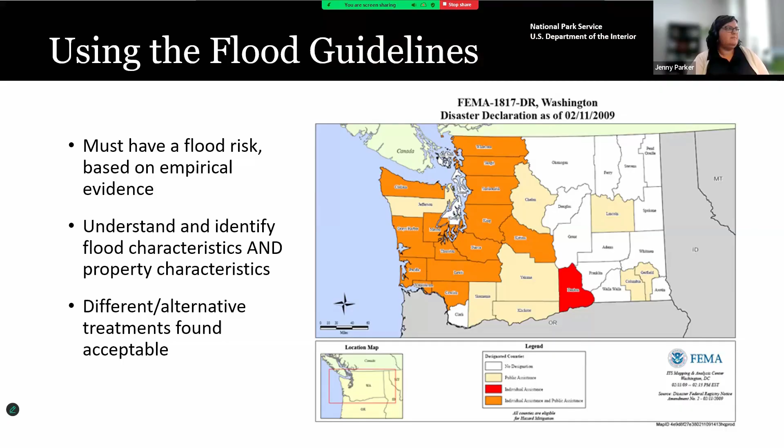So let's talk about assessing your risk and selecting treatment. One thing to be aware of is that you need to do the best you can to understand what the future conditions at your site are going to be. And we understand that this is always going to have some element of guesswork to it. In many cases, we're talking about very highly educated guesswork, but there's still some level of uncertainty.

Future conditions might have a broad range depending on our current use of certain materials or the way that our community is choosing to adapt on a larger scale, which can have an implication for specific sites. So for those kinds of reasons, your predictions or your guesswork for the next 5 to 10 years are going to be more reliable than your future condition expectations when you start looking out 50 years into the future or 100 years into the future. So keeping that in mind with any project as you're starting to plan, it's important to identify a time horizon for the adaptation project that you're planning, and that should be a conscious and logical choice.

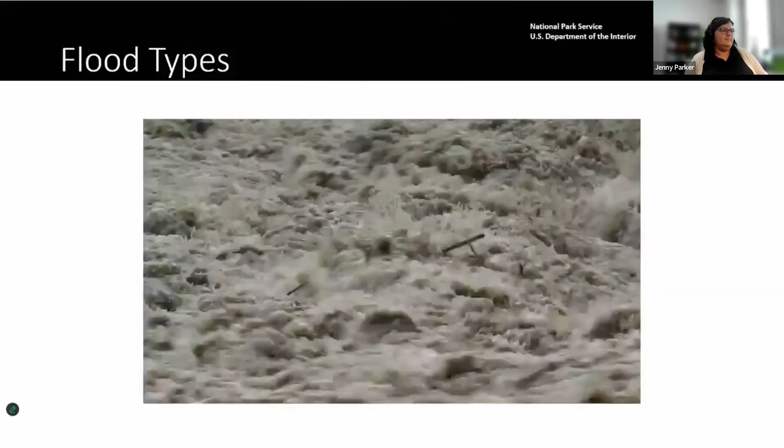Flash floods occur with little warning time, developing over minutes or hours, often due to heavy precipitation or the failure of a dam or levee. Floodwaters in these situations generally are fast-moving and often carry debris such as logs, boulders, fuel tanks, or even cars in extreme cases. Flash floods are generally associated with a waterway, but it could be a minor stream or creek that is barely noted or completely dry at other times.

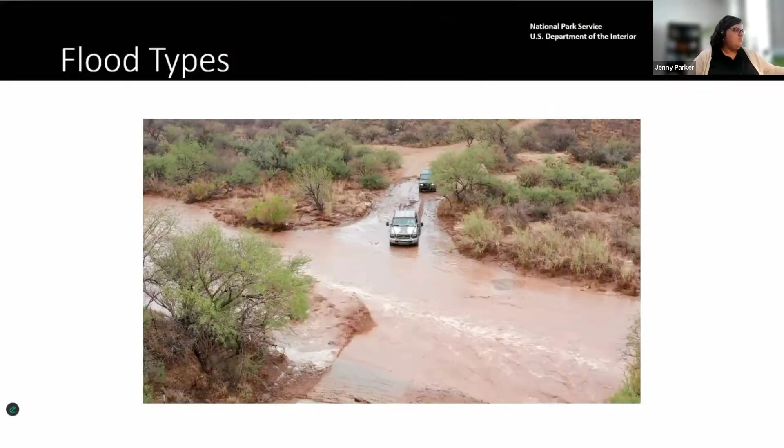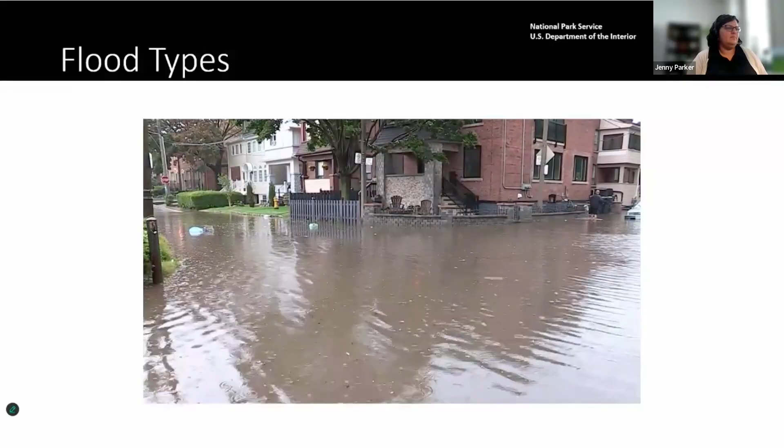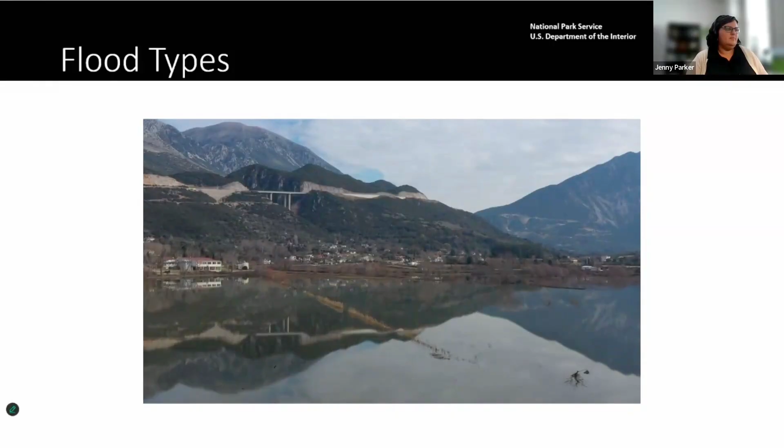Surface floods, also called urban floods, can occur in any developed area. This type of flooding is most often caused by intense rainfall that overwhelms a storm sewer system, causing water to overflow into roads and buildings. Areas damaged by wildfires are especially susceptible to surface flooding because of the changes to the soil caused by fire and the loss of vegetation that would ordinarily help absorb the rainfall. There's generally little warning time associated with surface floods.

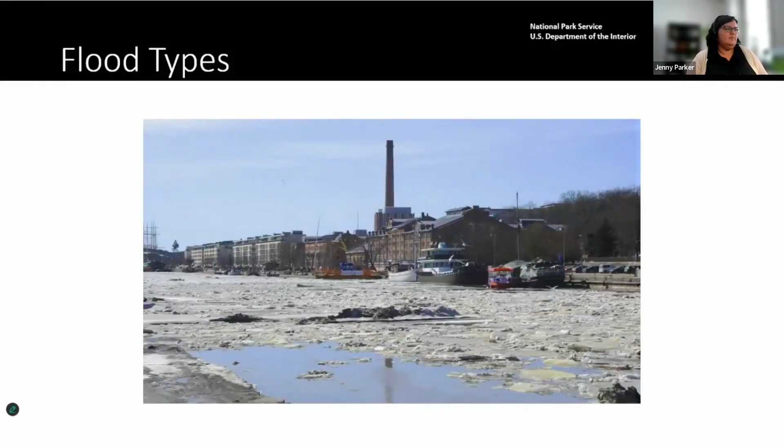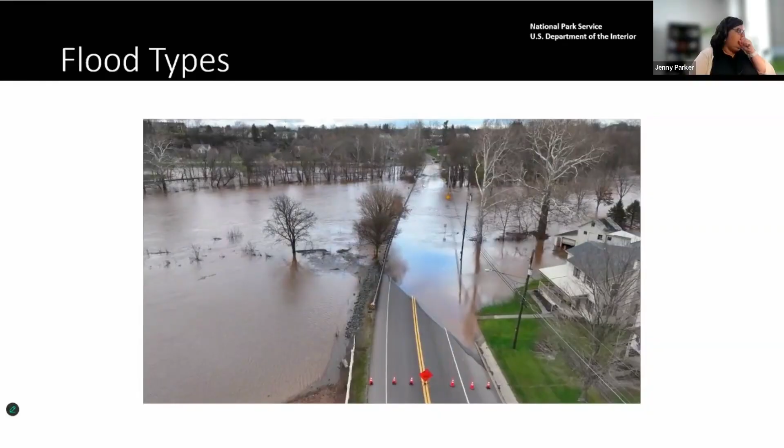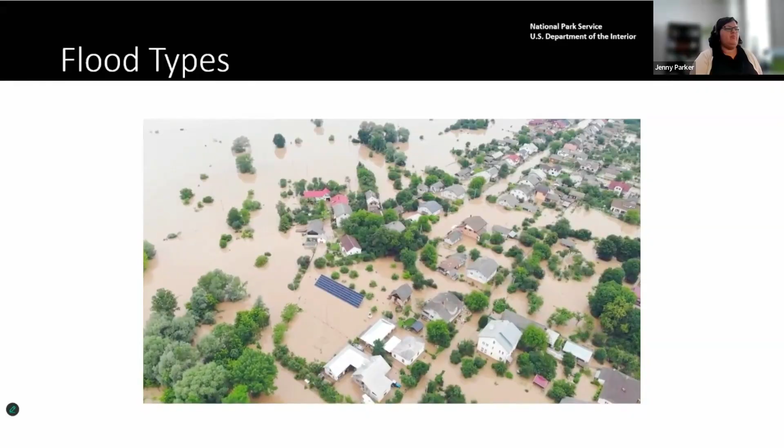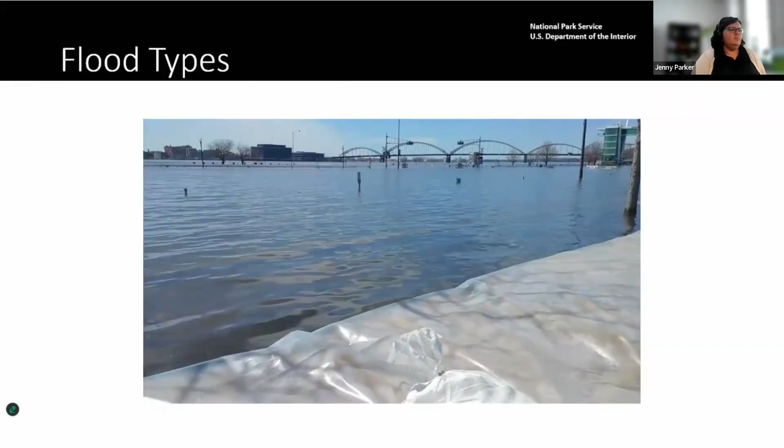Riverine floods, also called overbank floods, happen because of snowmelt, ice jams, or heavy and/or prolonged periods of rain feeding a river or stream. The waterway reaches capacity and the excess water spills into the surrounding areas. In areas with wide, flat terrain along a riverbank, floodwater may rise gradually with little velocity, but in steeper areas, floodwater can rise quickly, moving with speed and carrying debris. Some riverine floods are predicted several days in advance, with meteorologists referring to a river reaching a flood stage, often along with a prediction for when the flood will crest. Riverine flooding may also cause channel migration or bank erosion, which can contribute to or exacerbate flood impacts.

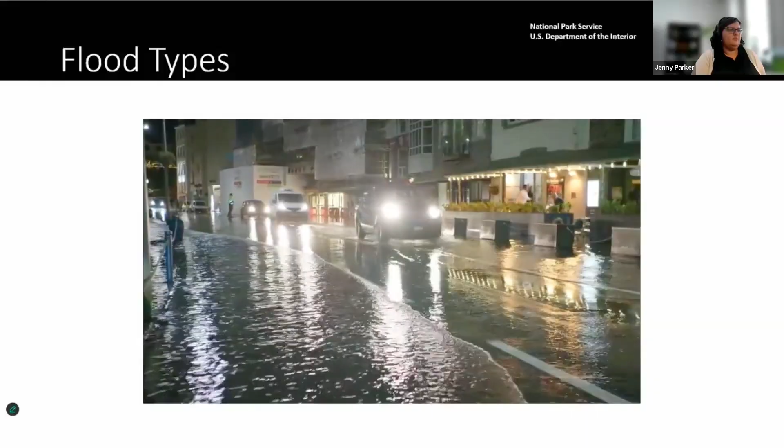Coastal flooding occurs along the coastlines of large bodies of water, including the Great Lakes and tidal bays and rivers. Extreme high tides, sometimes called king tides, can send water farther inland occasionally, sometimes coming up through storm water sewers. This type of flooding usually results in a few inches of water in the lowest lying land areas. Where sea levels are rising, occasional extreme high tides transition into flooding from more regular high tides. These events are often referred to as sunny day or nuisance flooding, which will become increasingly frequent in many coastal locations.

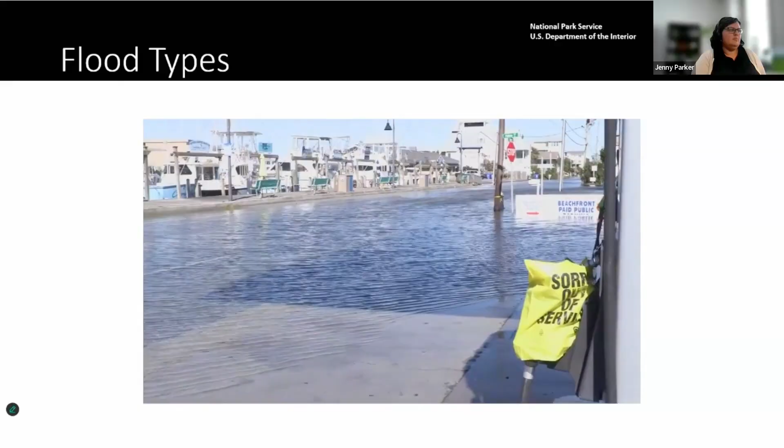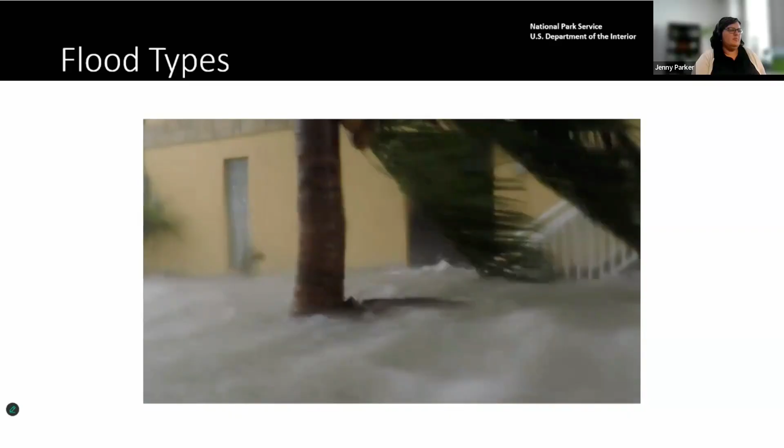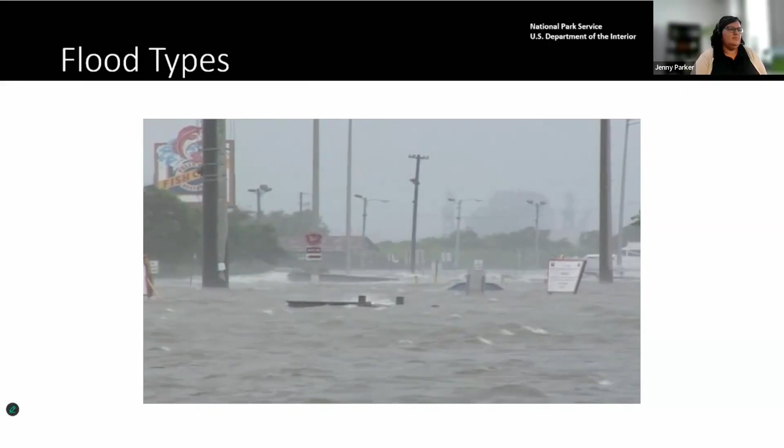Storm surge results from the winds of a storm, like a hurricane or typhoon, pushing water on shore. Depending on the magnitude and characteristics of the storm, this can result in fast-moving floodwaters with the added force of waves acting on any structure in the path of the flood. Flooding associated with both high tides and with storm surges are predicted several hours, if not days, in advance of inundation.

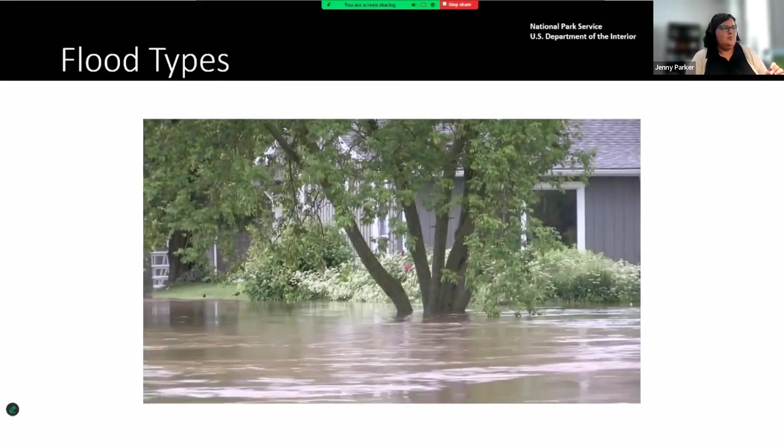Okay, so hopefully you recognize the type of flooding that is typical at your site. So if you have one in mind, hopefully one of those descriptions resonated with you and you can keep that in mind.

There will be a judgment call at a certain point. But the piece that I think is really important for us to dig into today is understanding the depth of your floodwater. This slide has a lot of information, and we're going to spend a little time here to make sure folks understand this concept before we move on.

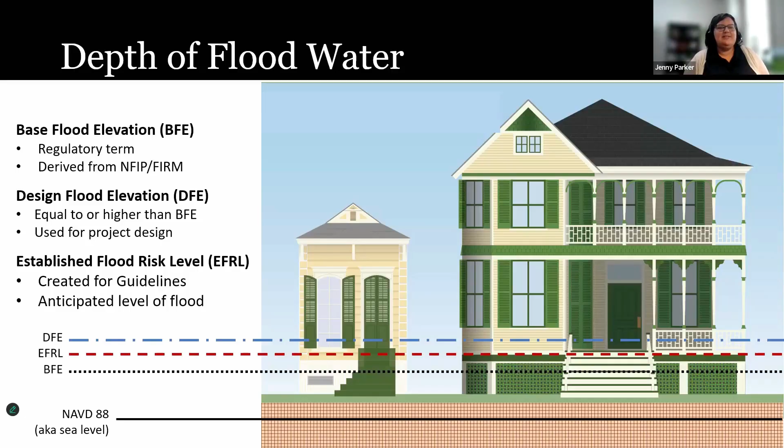Hopefully I've hit that hard enough and everyone's on the same page. If not, feel free to throw some questions at me when we get to the break here in just a couple of minutes. Let's walk through an example real quickly to illustrate this point.

This is a historic house in Rhode Island, first developed around 1728. You can see on the map it's located pretty close to the harbor, but not immediately on the water. It's a little misleading because this is an area that was infilled and developed over time. The house was actually very close to the water, much closer than it is now, but that land was filled in over time to create more area for development.

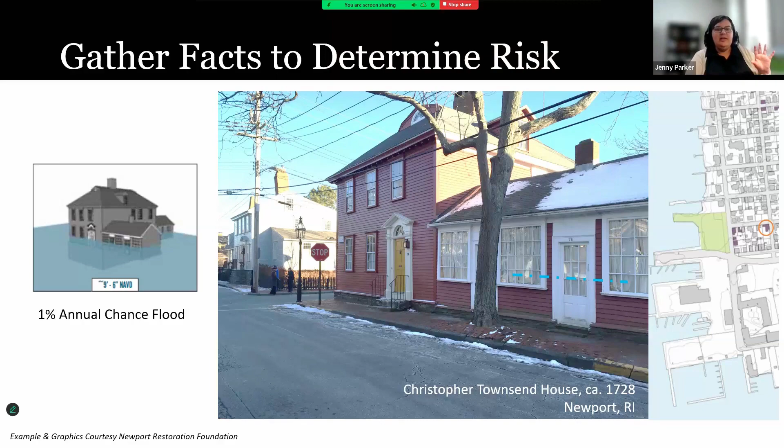In the graphic on the left, you're looking at a representation of the base flood elevation, which is the level representing a 1% annual chance flood—at this site equal to 9 feet 6 inches. Again, that's not 9 feet 6 inches above ground level; it's referring to that vertical datum line. When you measure that out, it comes to a spot I've marked on the photo with a blue dashed line. In the door on the right side of the photo, it's about a third up in the glazed portion of that door. That's your typical risk based on the base flood elevation information for this site.

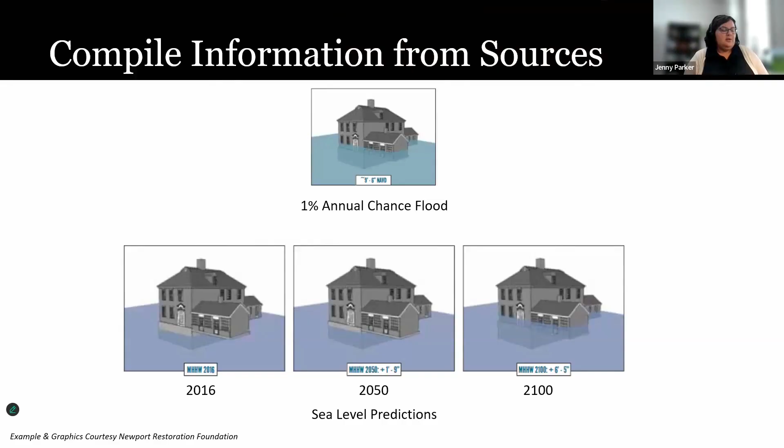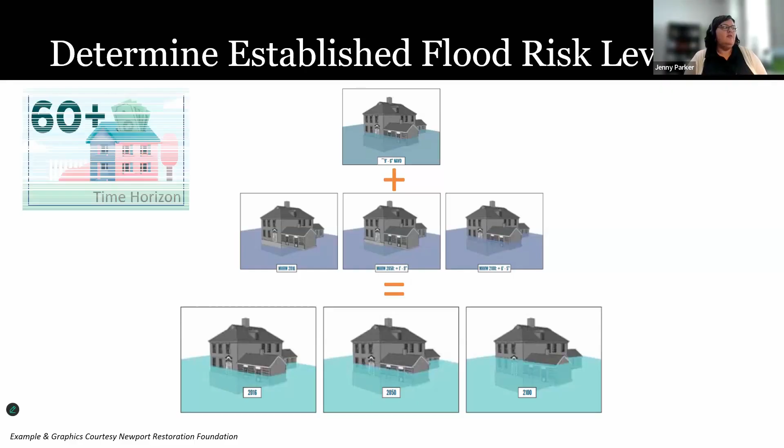So when we put all this together, we end up basically adding our 1% annual chance flood level onto those increases in sea level rise, giving us three different time horizons for our potential risk. If you're planning a project where the pieces and parts have a relatively short service life, you can probably get away with planning to current conditions or maybe to 2050 conditions. But if you're dealing with structural changes meant to last however long we can manage to preserve the site, you might really want to look at what the risks look like in 2100.

This is how you can add up your different risks in one simple example and arrive at an established flood risk level. So again, if I gave you this site—a downtown building, a fairly typical wood frame house, row house—and told you that the established flood risk level was 6 feet...

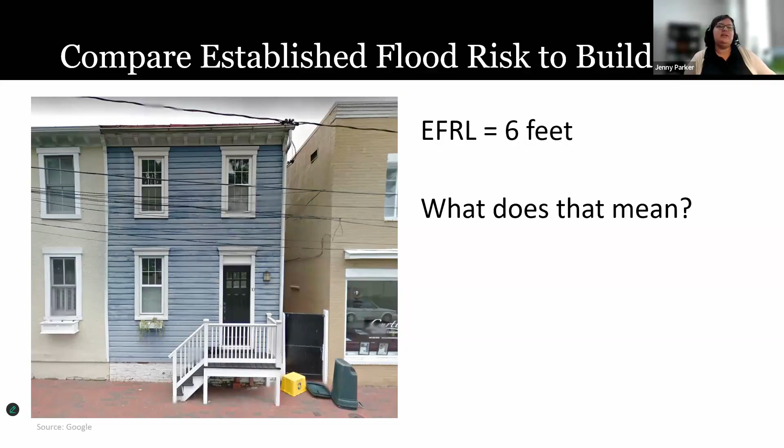I'm guessing you're all scratching your heads thinking, well, Jenny, that's not enough information. You already explained that 6 feet does not mean 6 feet above grade. If that was your thought, you're right with me. If you just know the raw number, it doesn't help you plan against the adaptation you need to do. It's a first step, but you need another step to place those numbers in the real world and compare what the risk is to your building.

The way we do that, a common way, is by hiring a surveyor to come out and complete an elevation certificate for the building. Elevation certificates are part of the flood insurance process and do have some regulatory implications. You don't always have to go for one just to get the information you're looking for, but a survey team is a great route to go that's generally pretty affordable.

What they can provide with the elevation certificate is a form that's all laid out, so the surveyor will come back to you with what your base flood elevation is at that site. It will reference the existing flood insurance rate map with the effective date and what flood zone you're in. It will also identify if your site is in a protected area—for instance, if there's a levee between you and the flood source, this certificate will identify that. It also provides basic information about the building and property that helps identify what part of the property is most at risk.

What kind of impacts can you expect based on the flood insurance rate map? Some of the information the elevation certificate gives you is the first floor elevation, which is really critical—you want to know what height your first floor is compared to the established flood risk level. Another critical piece is the lowest opening, like a basement window or a vent, anything that could let water start getting inside the building. It'll also look at your equipment on site, like an air conditioning unit or furnace in the basement or on the ground outside your building. The elevation certificate will give you all of that information.

According to some quick web research I did, at least on a national scale, the cost of these certificates can range from like $600-$700 up to $2,000-$2,500. So yes, it's an expense. If you're a private property, single family home, it can be a hit on the pocketbook, but it's not out of the realm of what's reasonable for a typical property owner, especially when it gives you such valuable information.

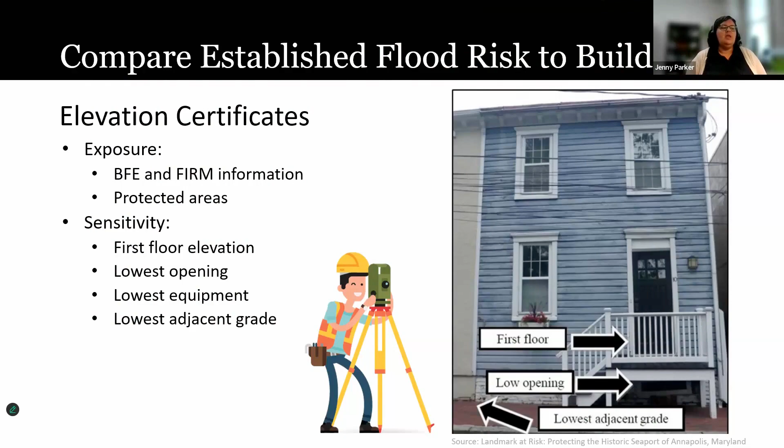I will say it's not the only way to get this information. There are some low-tech ways, like if you have a good topographical map that gives you geographic elevations you could compare. The problem is you have to make sure the topo map uses the same vertical datum as the flood information is given in—just a caveat there.

Once you have all that information, you can identify and draw the line—a term we've started using as shorthand within our building to refer to that line, that height of floodwater, that level of risk. You can draw it on a photograph or across the building to understand how high you expect those floodwaters to go, and that tells you which parts of the building and site are most at risk to damage.

Once you understand how high the flood is expected to be, you can start analyzing the existing property to see if you have any existing capacity to sustain and recover from the predicted flood event. Whether the property is in good or poor condition will matter greatly—just good maintenance can go a long way.

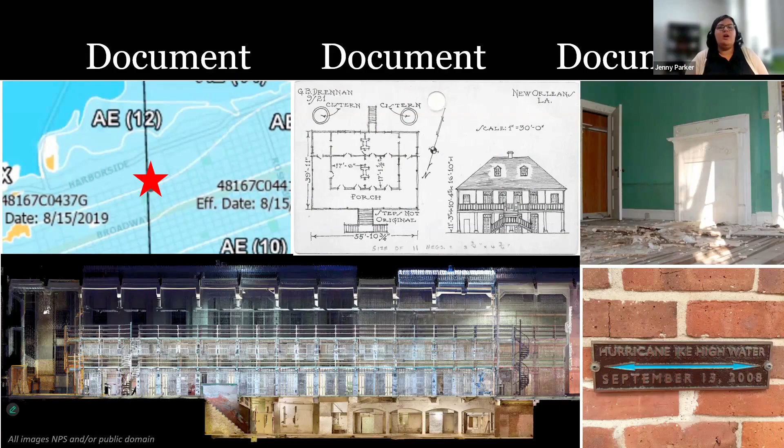Once you've figured that part out, it's really important that you document your conclusions. I like to refer to this as very similar to learning long division in school, so the final answer doesn't count unless you show your work. You really need to write it down because at some point you're going to need to talk to other people about it and share how you came to your conclusions, whether you're getting into a permitting process or just talking to your neighbors to explain what you're about to do. You're going to want to have it written down and documented so that when you move forward, everybody is on the same page.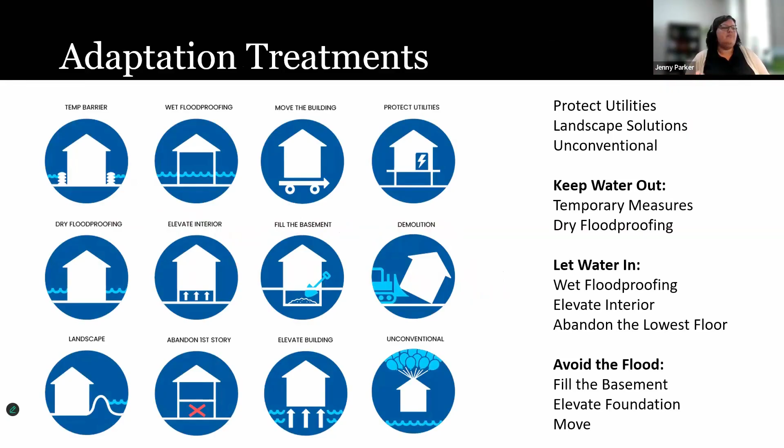Within the guidelines, we have a lot of different adaptation treatments that we describe. They're all listed here. I'm not going to go through each one individually, because that would be its own 90-minute webinar if we got into the details of each one. But we've grouped them into categories that I'll go through in a bit more detail.

The first category, as the name on the slide suggests, has the goal of keeping water out of the structure, or holding it off the envelope of the building. These treatments can include temporary measures like sandbags or inflatable bladders, temporary fencing or walls, or long-term permanent infrastructure like a flood wall, a levee, or a dike.

At the building level, the goal in this category is to keep the interior dry. So we can see something like dry flood proofing, where we're waterproofing the building envelope and closing off, either permanently or temporarily, building openings. If we decide to go with this kind of building envelope fortification, it can require structural improvements in order to withstand the flood dynamics.

The preservation concerns vary greatly. There's a lot of variety in this category, with much less concern for temporary treatments, up to some very challenging preservation issues around properties that require significant alteration to dry flood proof. And of course we have landscape and setting concerns with some of the landscape elements. So that's the overview of that category.

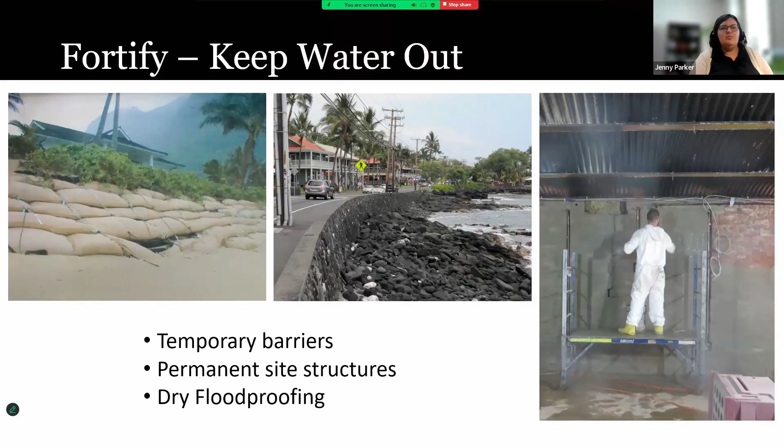Moving on to the next category, instead of holding water off a site or structure, the design of these treatments is intended to allow water to move through the site, or anticipate that water is going to enter the property. So what we're talking about here is wet flood proofing, which addresses water moving in and out of the property, designing the building to minimize damage.

In concert with more resilient finishes within the building, you may also pair that with elevating the interior floors, or you might decide to abandon the first floor of a building altogether. Either of those options would require considered study and design, but they can allow water to enter and exit a structure in a controlled and much less destructive manner.

So these spaces designed to be wet can be created with sacrificial finishes. You might need to think about using these spaces with limited use in mind, and again, the use of interior platforms to keep some parts of the interior dry.

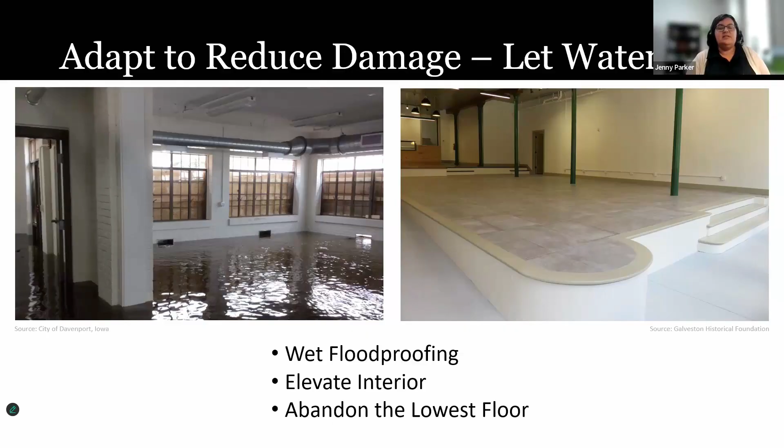One thing to keep in mind with any of these options is that the treatment will always require some level of cleanup and drying out after a flood. So they're generally not optimal for spaces with historic features and finishes that can be damaged by floodwaters. But if you have an already damaged building, and you're coming back post-disaster, this is a choice that a lot of commercial buildings particularly decide to take.

Another category, and these are actually the most common treatments used for residential structures, given various incentives that exist out there from the world of flood insurance and flood ordinance compliance. They largely stem from FEMA preference, because the goal of this category is to avoid the impacts from floods altogether by removing either the entire structure or part of it from the floodplain.

This can be done by increasing a building's finished floor height or elevation. If you're only getting flooding in a basement, filling the basement eliminates that issue, if planned correctly. You can elevate a building on a higher foundation, or simply move the building out of the flood risk area.

Each of these comes with fairly significant preservation concerns, particularly elevating and relocation. If you go really high, especially with elevating a building, you may create a very noticeable visible alteration, which can significantly impact historic character and appearance on the site.

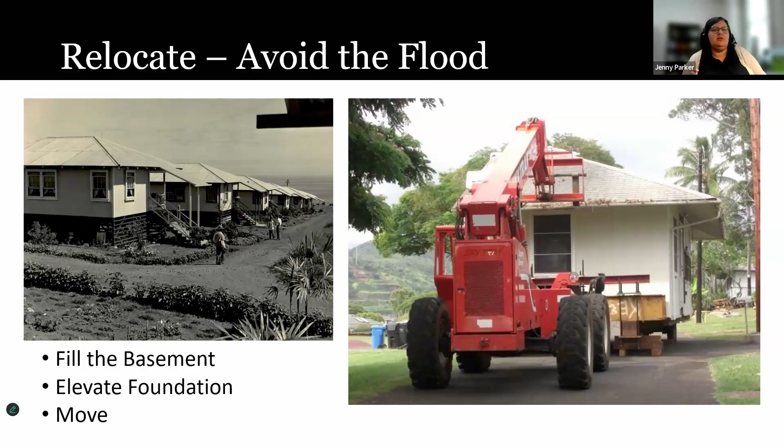I do want to mention, for those interested in the grant program that the Washington Trust will be operating in the fall, relocation is not an option, I believe, for that grant program, but you should double check to make sure I've got that right.

The final category in the types of adaptations is the unconventional adaptations, and we called them that ourselves, not anybody else, because they're not currently recognized by FEMA and the flood insurance program in the same way as the other treatments. Many of these are in the prototype testing phase or need additional application to fully understand their potential and potential consequences.

So this can include amphibious design, which is applying a buoyant foundation to a building so that it floats on top of the floodwaters. There are also hydraulic lift systems designed to use the pressure of the floodwater itself to lift the building out of harm's way.

And there are any number of innovative large-scale landscape flood protection projects that have kicked off over the last 15 to 20 years. These can be very complex engineered systems and networks that reestablish natural systems in conjunction with some engineered systems. At landscape scale, things can get very creative and interesting, but that's not usually happening at an individual historic property.

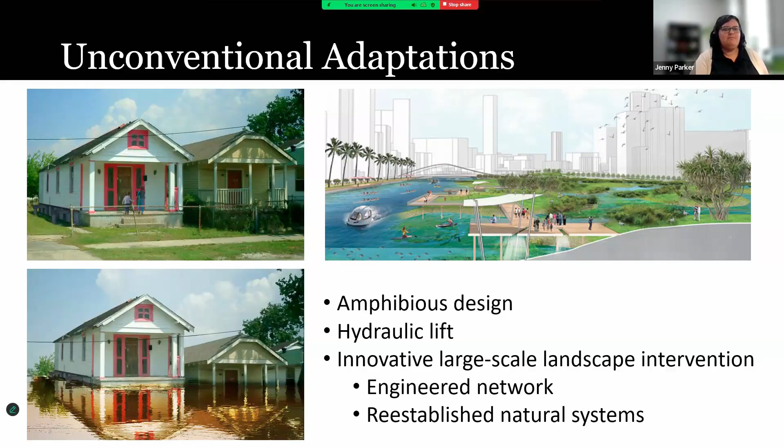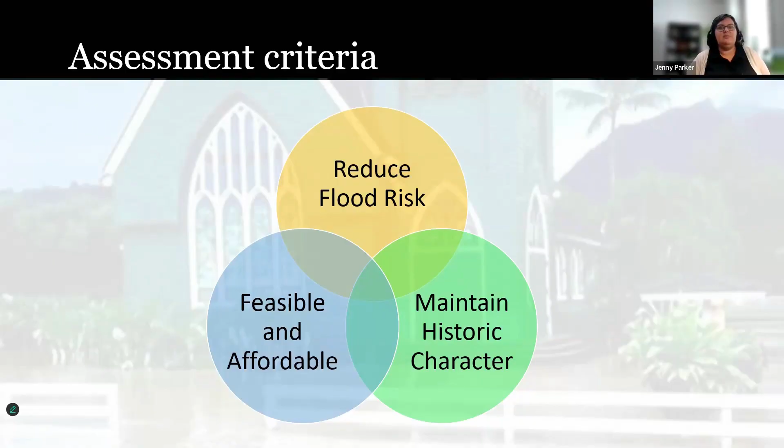That feasible and affordable option - sometimes we don't do a great job in preservation of keeping that in mind, but particularly with flood risk, you can have the best adaptation plan in the world, but if you're not able to actually implement it, the building is not safer. We have not done our job to preserve that building. So it's really key to keep that in mind.

Going through each of these criteria, I want to talk about some questions you can ask yourself as you're evaluating the different adaptation options. When talking about reducing flood risk, you want to know if the treatment will sufficiently reduce the risk of damage caused by the flood that you expect.

Again, you've got to decide on that time horizon - how far into the future are you gaining protection? Selecting the time frame can be informed by all manner of factors. We've talked about using your project itself to help decide, and you can also use the length of time you plan to manage or own that site.

There are also other factors that you can include in trying to select that time frame, but do have one in mind as you're making your plans.

For maintaining the historic character, what we're really talking about here is applying the Secretary of the Interior standards and analyzing what impact the treatments will have on the historic character of the property. So we go through this series of questions.

Can the treatment be implemented without visible changes? If that's not possible, then would it be possible to match the appearance? If the appearance can't be matched, is there a compatible solution? It's also helpful to consider viable treatments in the context of the overall neighborhood or community.

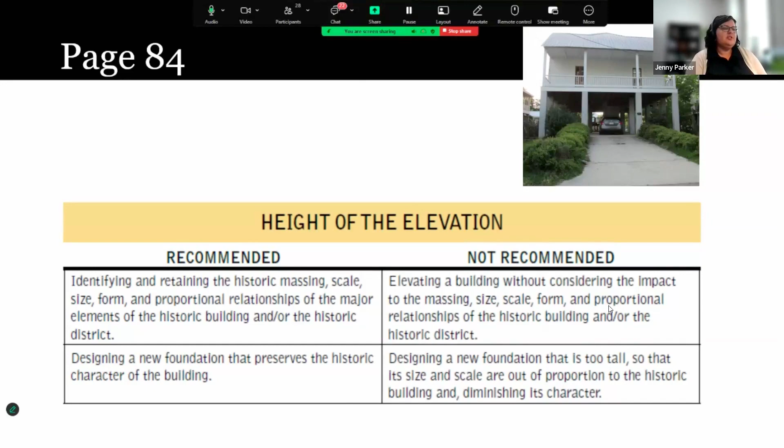Looking at the second box under the not recommended column, we have designing a new foundation that is too tall, so that its size and scale are out of proportion to the historic building and diminish its character. That starts to get at some of the gut instincts a lot of people have about this particular adaptation.

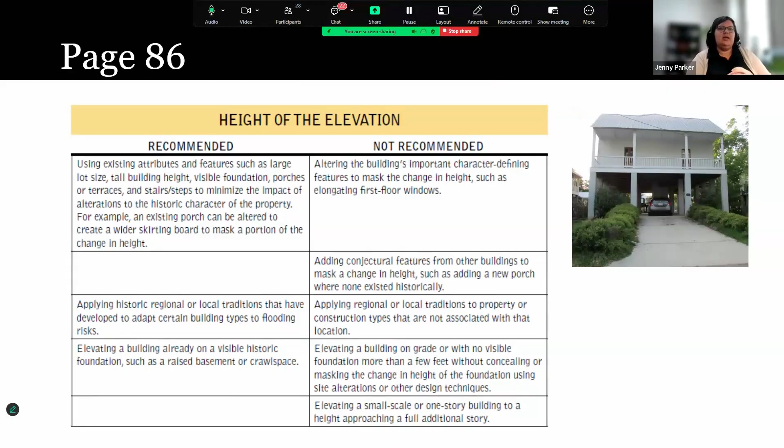Moving on, on page 86 we're still in the section talking about the height of the elevation. Looking at the final box at the bottom under not recommended, it says elevating a small scale or one-story building to a height approaching a full additional story. In this case they went even higher than a full additional story, or right at one. Using examples that already existed helped us draft the guidelines we're actually reading, and helped us identify the pieces and parts that go into a project that, on the whole, will maintain the historic character or not.

Jenny, sorry to interrupt, I just wanted to give you a 5-minute warning. Oh gosh, we've gotten way late.

Okay, thank you. So on page 91, I won't read through these, but we have a section on access. In this particular case, access to the building was lost to a large degree through removal of the front steps, and the front porch became more of a balcony instead of an entry point.

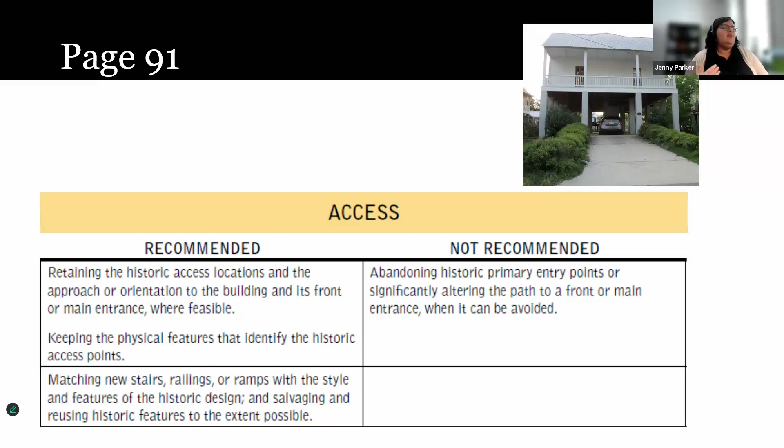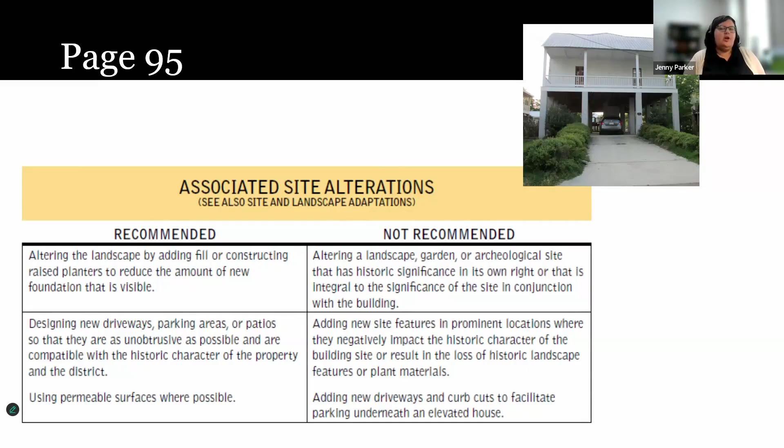And then on page 95, looking at site alterations, with this example we end up with the front yard dedicated, not entirely but mostly, to a new driveway that did not exist before. Driveways can be accommodated if you're elevating to a point where it makes sense, but avoiding the front yard is a key point here.

So I did want to mention, and I think you'll talk about this more in the next webinars, that all of these projects will require some level of review, permitting, or approval. So it's really important to document the reasons and show your work establishing your flood risk level, so that when folks are reviewing, they understand you're trying to solve for this flood risk and therefore chose a particular adaptation, and they understand the constraints you're working under. It makes for a more collaborative process, and folks can understand why you're making the decisions you're making, even if it starts to push the envelope on maintaining historic character. It's a major goal, but sometimes we're pushing the envelope here.

Luckily, this building was saved. I can give you that good news, but make the decision, try not to prolong it, and don't get stuck in the endless cycle of study. We're never going to have all the information that we want about our risk or about our future projections. Do the best you can, document what you've got, but at some point you're going to have to make a decision and try not to drag that out too long.

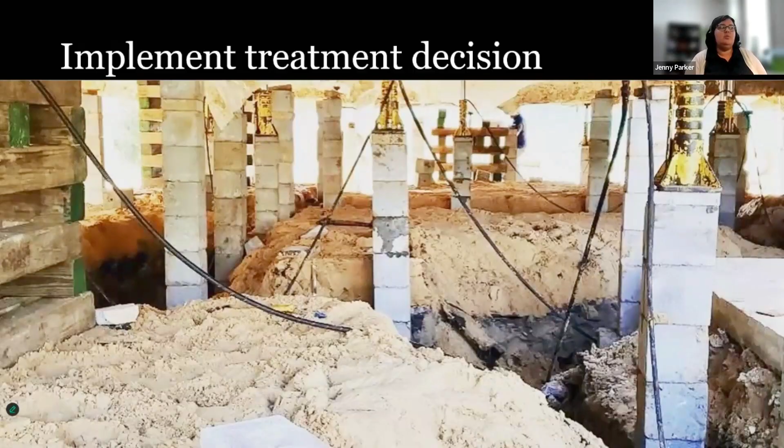Once you've made the decision, again, a plan is only as good as it is once you implement it. The building won't be preserved. It won't gain resilience until you implement whatever adaptation you decide on. And then once you've adapted, your work unfortunately isn't quite over. You're going to need to continue to evaluate to make sure that the resiliency that you planned for is provided in reality.

This picture on the screen is one of the case studies at the end of the flood guidelines. If you're interested in the specifics, they chose dry flood proofing, had a flood within the first year or maybe two after finishing their adaptation project, and everything worked exactly as they planned, which is what we all hope for.

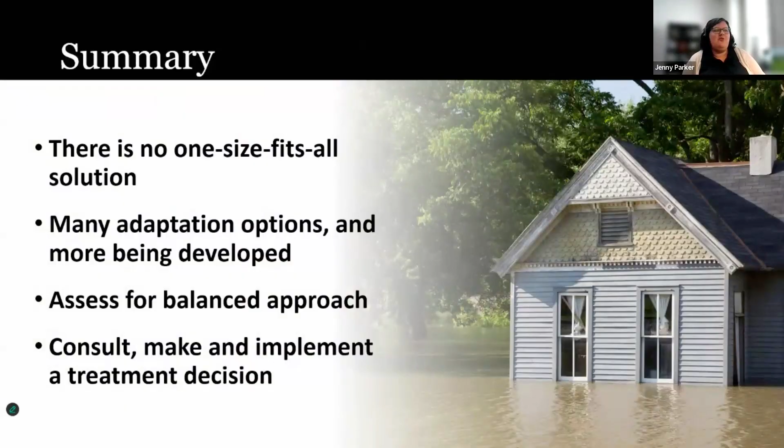So I rushed through the end just a little bit, but hopefully not too much. I see that we've got about, do we still have about 5 minutes for questions? I will let Alex make that determination. Yes. But you see a summary here on the screen of what we just covered. Scratching the surface of some of it, but hopefully it gives you a good idea and some good tools to move forward.